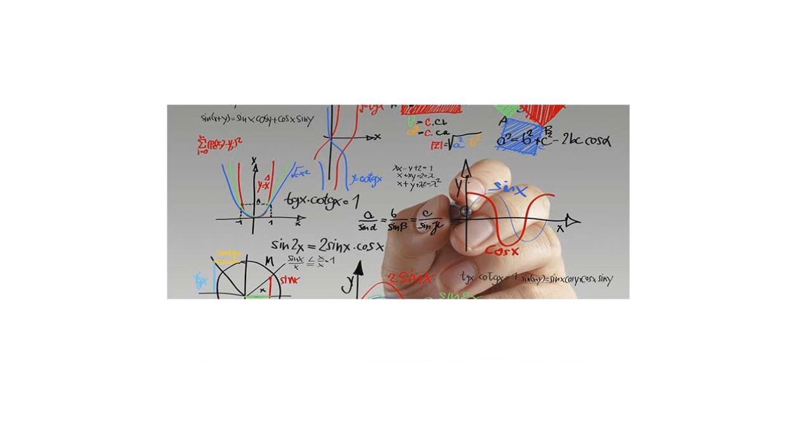We create things by using the database of nature or the universe. Everything we create must have meaning to exist. This meaningful thing comes from the natural rules we know, and we must use the natural rules to do everything. According to the law of conservation of energy, even our design or creation does not come from nowhere.

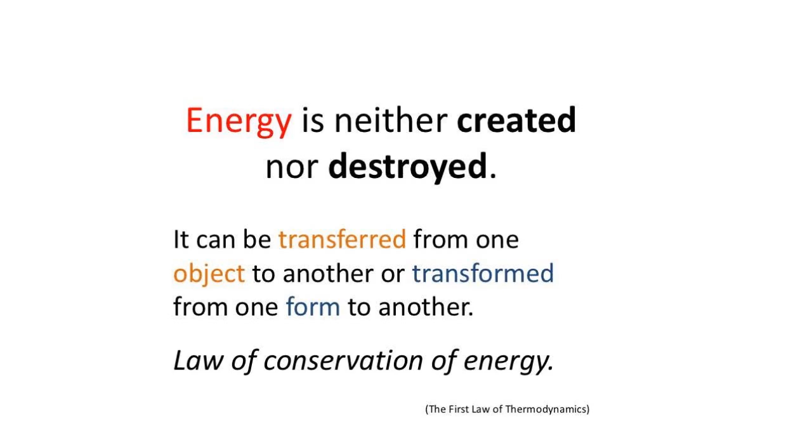They are a combination of rules and laws of nature and the universe that humans discovered. Every single thought and creation belongs to the whole universe, because we humans are part of it, and what we think and create is part of the universe's operation. To nature, we are just like the cells of a human body, appearing when the environment is fitting for our survival, searching for nutrition to feed ourselves, grow and breed.

And then, when we adapt to a new environment, we develop, we evolve, we create. But that's only the operation of the whole human body, and the human may not notice what happened in his body.

So, compared with the human developing mode, the development of architecture design, or any design, all follow the natural rules. We do not design with no purpose, because all human activities take place with reasons. Why do we need architecture? Yes, a shelter for sure, to prevent us from the disturbance of nature and create a relatively suitable environment for us to do our activities.

And then, when things become history, we need to memorize them. We start to draw history on the stone, on the wall, and later we learned how to retain memory by building architecture. So different styles of architecture appear in different areas all around the world.

We need different functions of space to do different activities, so more and more different shapes of architecture appeared. We can simulate this development with some real-time strategy video games: build houses for growing population, build mines to produce energy, build barracks to train army, and build laboratories to develop technology.

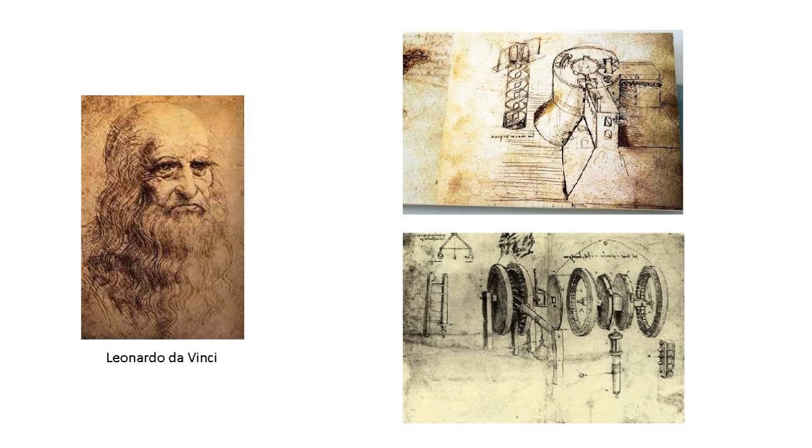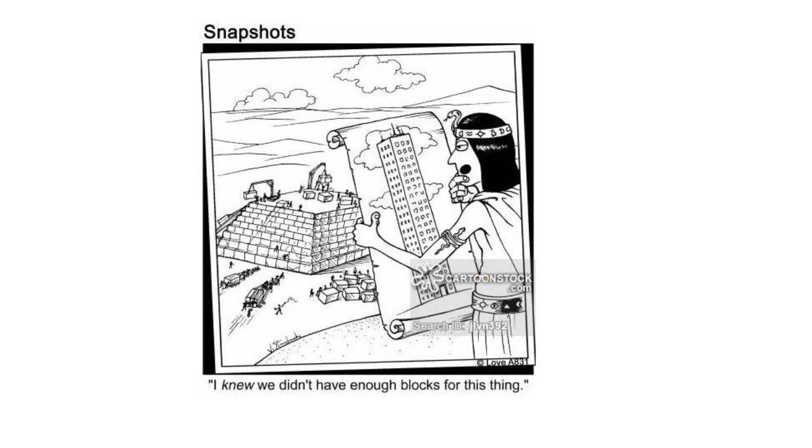For centuries, architects were not only the masters of spatial effects, but also closely involved in the construction of buildings. They commanded the construction workers directly, face-to-face, at the working site, and monitored the construction process. However, this phenomenon changed at some point in the past, when architects were separated from the whole design and construction process, and became responsible only for the design parts.

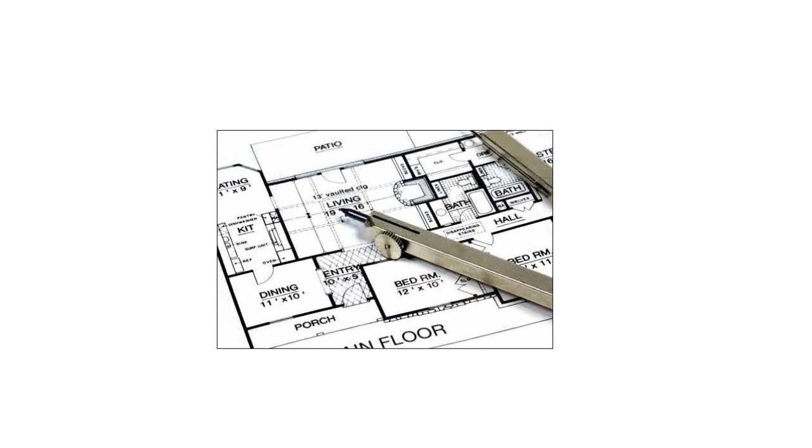The original reason for this change was the introduction of the widespread design communication method: drawing. It is a fact that image communication is very important for architects today, but maybe it was just that drawing emerged and caused the present separation of design and construction, though others think that the need to separate design and construction made drawing appear. With the help of drawing, architects could work in the studio and communicate with construction workers through drawings, which gradually made them far removed from the fieldwork process.

Architects now are considered more as thinkers because they come up with ideas and extract concepts, and that makes them become an image to show to others. They talk and discuss any aspects of design or realistic problems in the world and try to solve them with their professional knowledge.

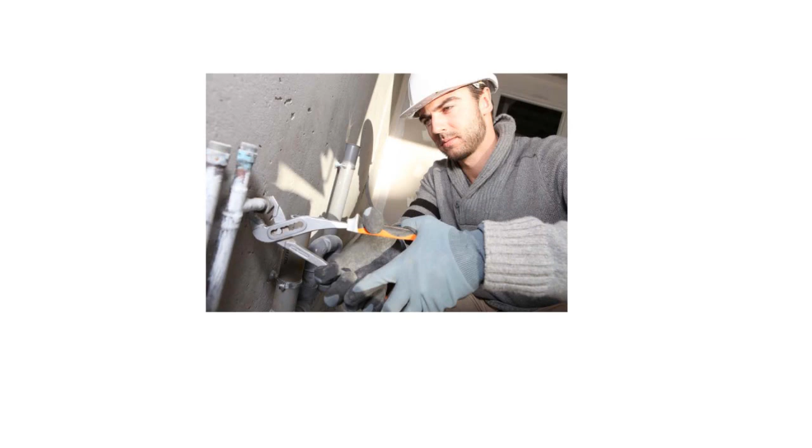However, they prepare for their profession by studying at university instead of training in a shop or on site, like plumbers or bakers. They may not know much about the construction process, because the duty of designing the structure or other details has been distributed to other types of professions.

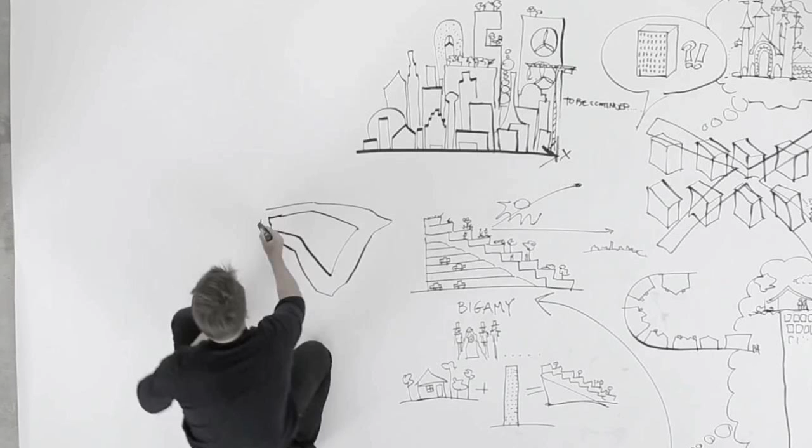As a matter of fact, it is not exaggerated to consider architects as artists, because most of them can present really good hand-drawing skills, so we can consider their work as art. Many architecture and design courses emphasize the importance of hand-drawing and modeling as an effective way of communicating and developing a design brief. While the role of hand-drawing is undoubtedly significant, the reality of day-to-day design practice now places far more importance on drawing and modeling using digital means.

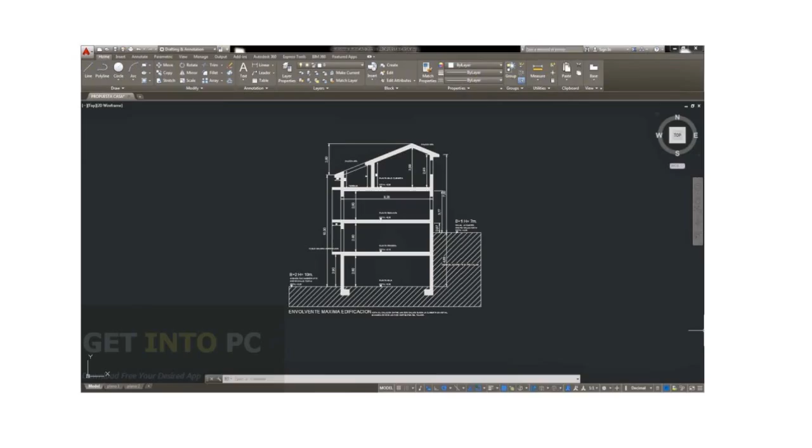Therefore, here is the introduction of digital design in architecture. As computer science develops more and more rapidly, with wider use of the internet and different kinds of media communication, designing digitally is becoming more and more common.

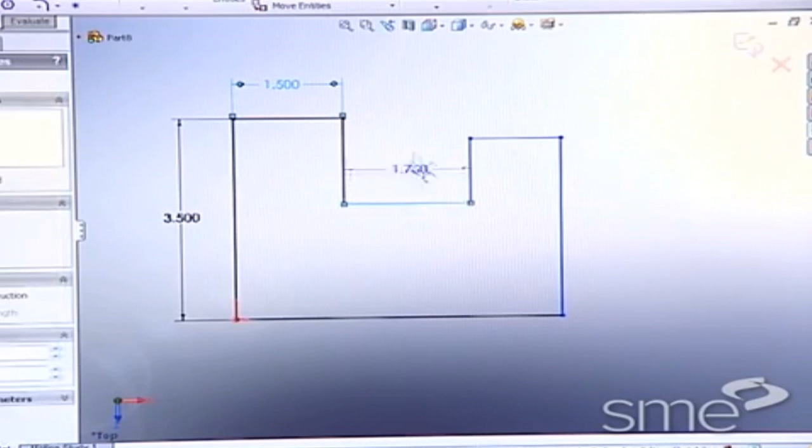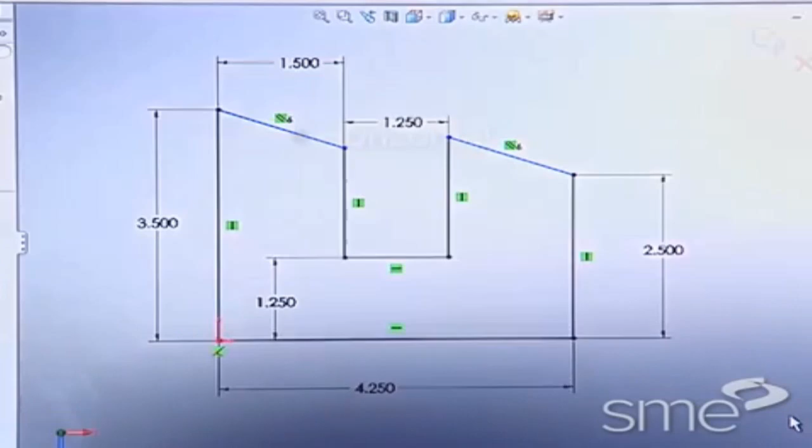Architects no longer only present paper information to clients and construction workers. They use digital media and the internet to show their design. At the same time, the need to draw design on the computer was required, just like the need of typing. Gradually, this design method, called CAD, was accepted by more and more people. At this early age, CAD means computer-aided drawing, but not the real CAD system we will talk about later.

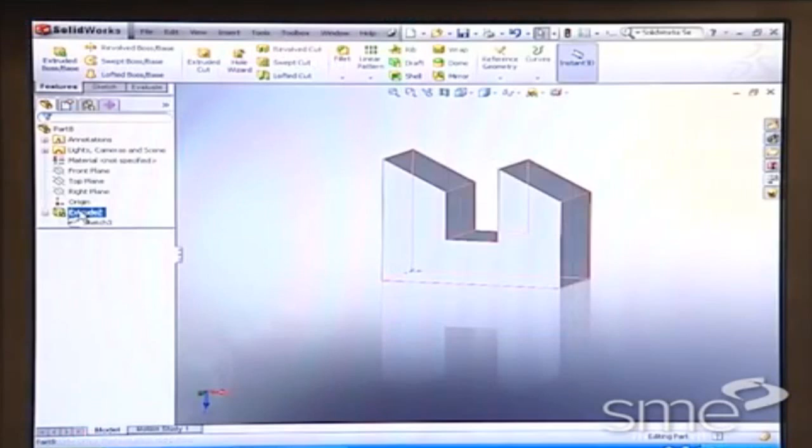In the early use of computers, architects considered the computer as a drawing tool, like a pencil, to draw lines on the screen rather than paper. According to Garber, traditional production tools such as pencils, slide rules, and triangles have now been substantially surpassed by the more streamlined and efficient ones embedded in computer software.

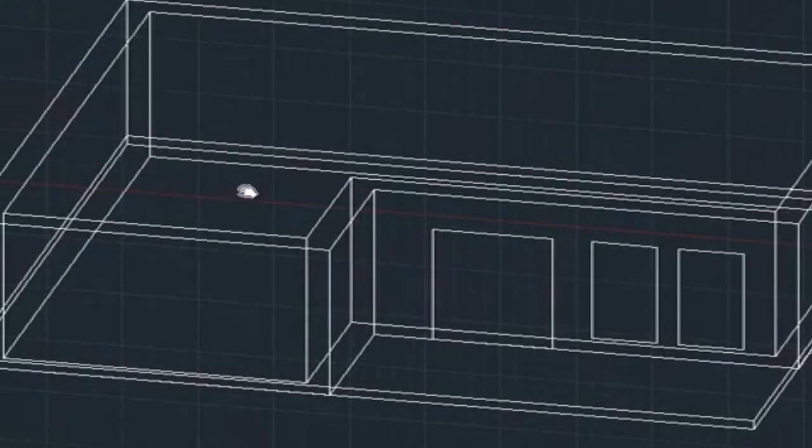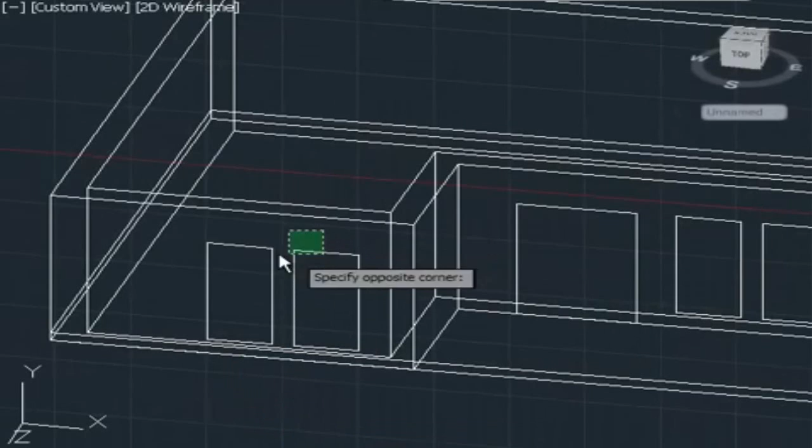Apparently, quickly and conveniently drawing and altering sketches on the computer, then sharing them via internet and digital media with others, helps designers save a large amount of time. They do not need to carefully draw each line of the design on paper slowly, and they do not need to start over once they draw a wrong line. With an easy click, the mistake on the design can be rapidly deleted.

At this point, the computer became a drawing tool just for saving time and enabling more convenient communication with clients, workers, and working partners.

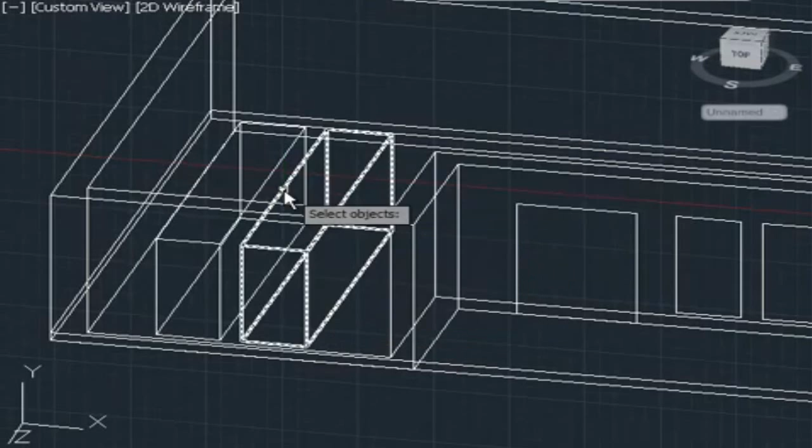According to Garber, during the first half of the 1980s, the CAD systems actually used in building design were primarily used as drafting systems. We are still speaking about a technique which hasn't reached its maturity.

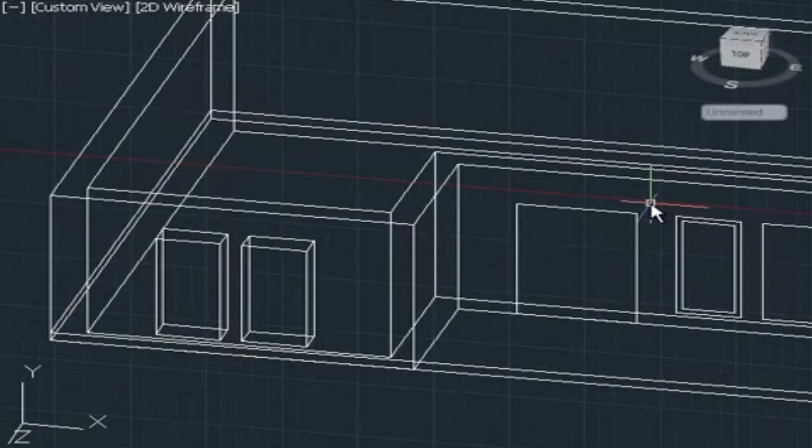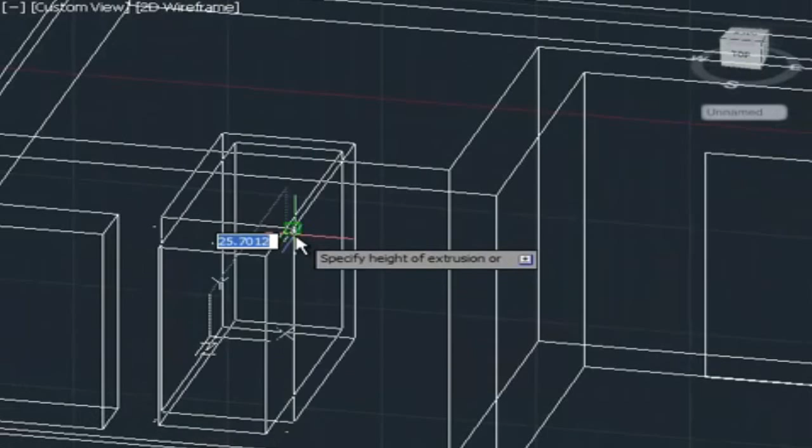According to Penn, the research and development of computer-aided design in architecture can be traced back to at least the early 1960s. According to Garber, structural engineering was one of the pioneer engineering fields in using computers to aid the design process. Programs were written for solving special structural problems as early as the 1950s, and the need for extensive computations in many design cases led to the increasing use of computers.

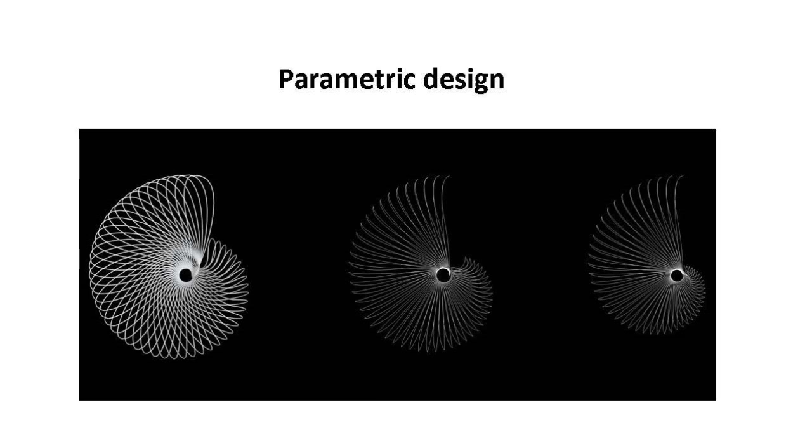Parametric design: as time went by, people were no longer satisfied with low-intelligence design-aided methods. They started to search for techniques that are more artificial intelligence based, to give their design more unpredicted possibility. Parametric design was introduced as a new technique in the past decades and has become popular at present.

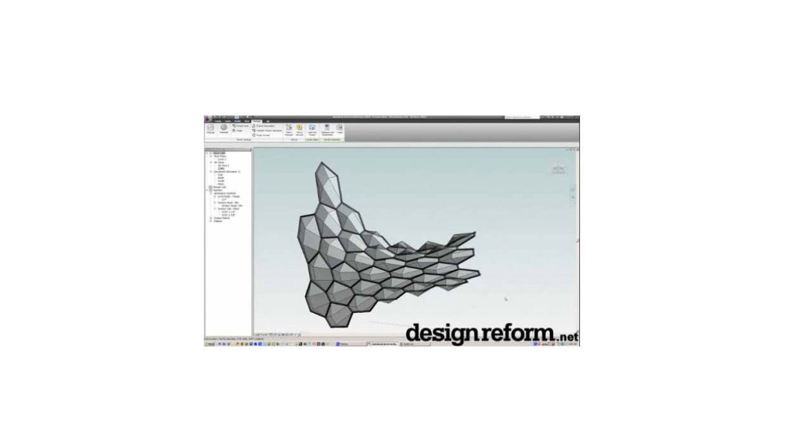According to Kolarevic, in parametric design, it is the parameters of a particular design that are declared, not its shape. By assigning different values to the parameters, different objects or configurations can be created. Parametric design is particularly useful for modeling the geometry of complex building forms.

According to Corsa, parametric design allows users to modify relationships between various features while tracking the history of these changes, thus updating all relationships performed after the modification.

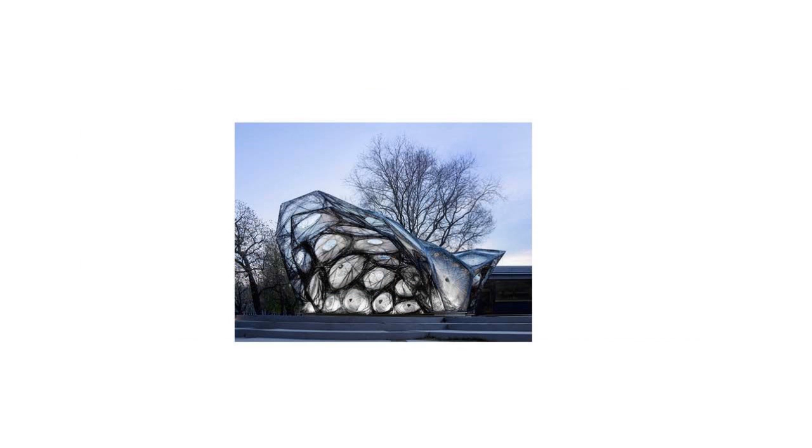By using parametric design process, we can set a series of rules to limit our design at a reasonable domain and modify the parameter within the domain. For example, we can set the rule that a window is always 6% of a room's whole area. So no matter how big the room area we modify, the window would always be 6% of the room area.

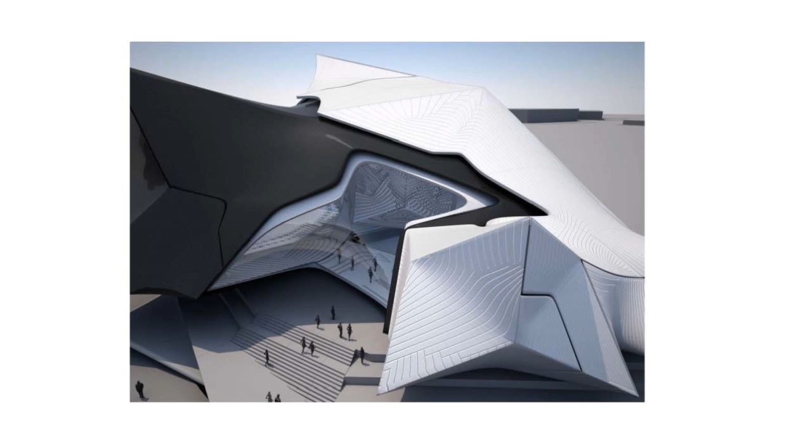As a matter of fact, parametric design can not only help us alter the whole architecture conveniently, it can also help us create forms and shapes that we could not predict or imagine. Usually in this situation, designers get different kinds of unpredicted results and they can choose the most satisfying result they want. Parametric design is a process that will definitely be included in any architectural design process.

It is a trend for the whole architectural design world. Maybe 20 years ago, even professional architects didn't know such a state-of-the-art thing, but at present, parametric design is being talked about and used in many architectural practices.

Although right now there are some obstacles preventing parametric design from successfully spreading, like the parametric software being expensive and some negative thoughts about its anti-intuition thinking. In the future, however, these kinds of problems will be solved naturally.

The reason why parametric design will persist is that it fits the convenience of the design process. We don't need to alter everything we create in our design process because we have set the principle to align the geometry relationship between each element we want them to have.

As far as I know, Grasshopper in Rhinoceros is a good example to utilize this rule. For instance, we can set a circle's radius and then duplicate it to several different heights and then loft into a cylinder. But we don't need to alter the cylinder if we want to change the shape of the mass ourselves.

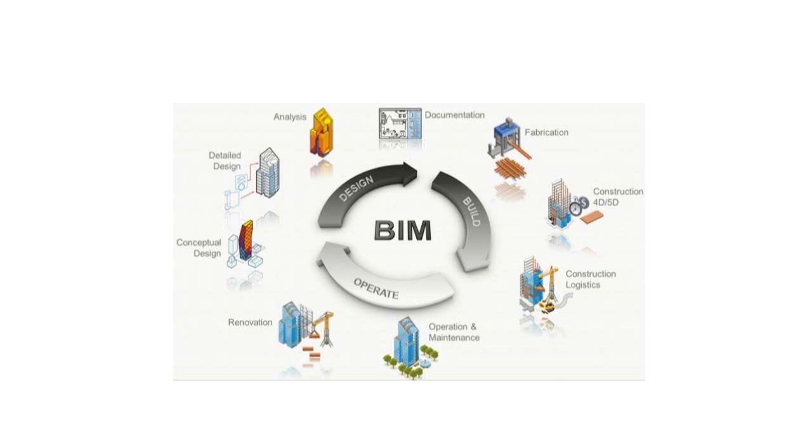For example, people use BIM for internal efficiencies in design with domain-specific design models. When designers merge models for design coordination, there can be fewer errors and less rework in the process.

Besides, in construction management, quantity takeoff, cost estimation, and scheduling, production can be more efficient and predictability can be improved. What's more, there can be more sustainability in environmental and life cycle assessments. But last but not least, it can be more efficient in maintenance process, in facility management and maintenance.

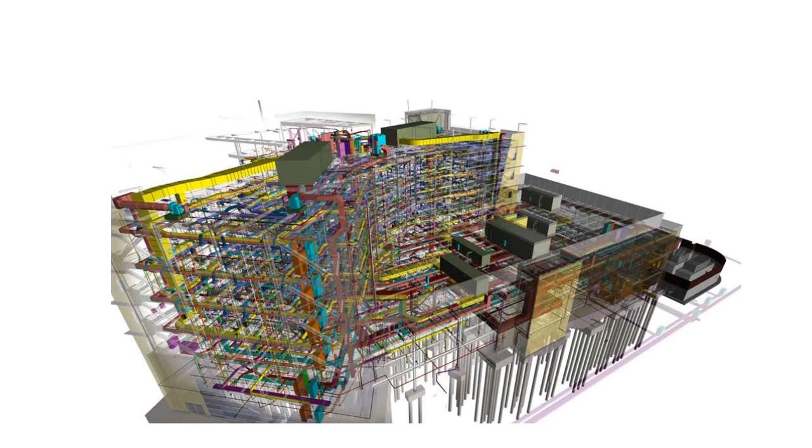According to Garber, what can the designer expect is that building information modeling promises that a single intelligent model can contain and coordinate the following information: construction documentation, visualization, material and equipment quantities, cost estimates, 4D construction sequencing and reporting, scheduling, fabricating data, and tool paths.

BIM is not just about technology. It's about the relationship of people, process, and technology.

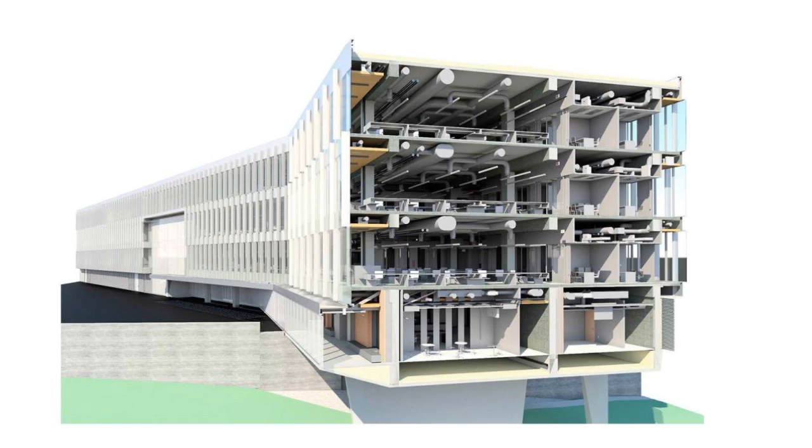BIM benefits different kinds of people. It significantly benefits clients through better design and more efficient and reliable delivery of facilities. For contractors, BIM reduces cost and time, enhances safety, and improves competitiveness for them. And for designers, BIM makes greater value through collaborative design, simulation, and engineering.

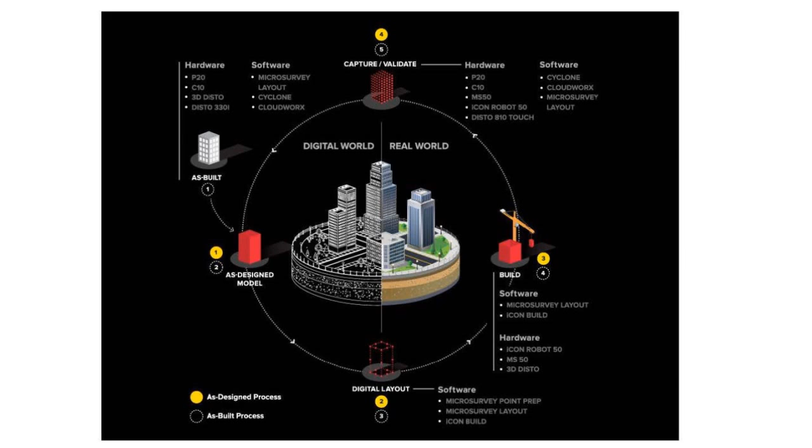However, some aspects still need to be improved with BIM as well. The most common mistake is the lack of spatial coordination.

Conclusion: design method change depends on many different factors. The way we drive our design is affected by a variety of reasons. With the need of saving time and communicating more conveniently, designers started to use digital design methods to replace hand drawing.

Later on, designers were not satisfied with the single function of computer-aided drawing, so something more intelligent came, called computer-aided design. To sum up, as time went by, humans' construction techniques developed more and more rapidly, and humans' imagination of designing more shapes and forms of architecture became much more powerful than ever before.

This is the time that humans can get rid of many limits that barred us in the past, and create as many state-of-the-art buildings as we can. Computer calculations shorten our time in designing, and even create a large number of results that humans could not predict, but can be used in real construction.

At the same time, widely use of networking helps architects spread their ideas and designs to the whole world, not only to communicate with their clients, partners, or construction workers.